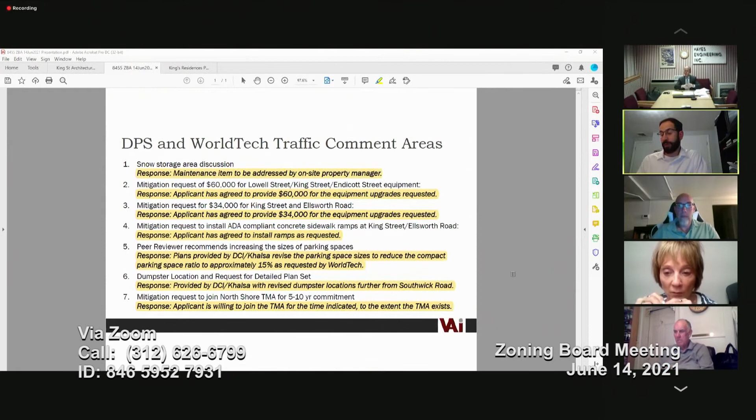No, my thought was, if there's no parking already on that one side, I'm okay with that, I don't care about that. I just want to make sure that if there is spillover, there's some protection based on my prior comments. Again, I'm just one voice, but my thought would be, if the city's looking to do that, or okay with doing that at some point, whether it's now, six months, or a year from now, that the applicant would be willing to condition this upon that. Again, I'm just one voice, everybody else doesn't want to do it, I'll jump off the topic.

So I'm sorry, Fran. So are you talking, Stephen, resident parking on King and Ellsworth?

Yeah, at least those two. Resident parking only? Through the chair, if I could. Yes, I think it's a good idea.

However, I've faced it before. The only problem with that is if you want enforcement, you are restricting the people who actually live there from having visitors who are visiting their house from parking in front of their house during the visit. That's a fair point. I didn't think of it that way.

I'm familiar with resident parking, say in Charlestown and the North End. And if Barry's right, if you're visiting or shopping or doing whatever, it's extremely difficult to find a parking space.

However, perhaps for the residents' sake, especially on King Street, so if you're going up King Street on that right-hand side where the building will be, I definitely think there should be no parking signs, because on the other side of the street where the houses are, they are parking, and the street is wide enough to handle that.

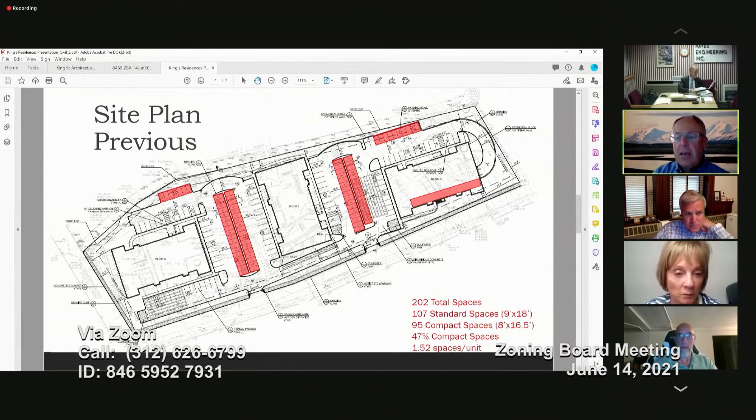The ZBA did not actually get those plans, but as far as the technical review agents, they both received them. Okay, I'll jump into this to keep it brief.

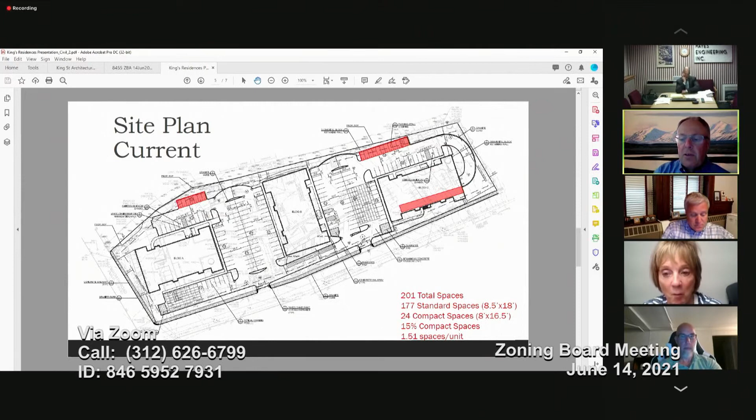I think the major final issue was, as we've talked about, the parking. We had 202 total spaces: 107 full-size 9x18s and 95 compact 8x16.5 at 47%, with a rate of 1.52 spaces per unit. In discussions with the reviewers, we came to a consensus that the standard space didn't need to be a full 9-foot width, so it was reduced to 8.5 by 18 for the standard space, and the compact remained at 8x16.5. So we lost one space, bringing us to 201, with 24 total compact spaces at 15%, which is well below what is typically acceptable even for a non-affordable element.

One item, let's go back a slide. As mentioned, we are cleaning up the southern curb line of Southwick—there'll be a defined edge, no longer open pavement in between. There'll be a landscape buffer with a defined edge and no access off that road.

The dumpsters, you can see them on the plan here. There's one placed up at the corner of Ellsworth, and another one pushed all the way up to King. They were moved as far away as possible as part of the review.

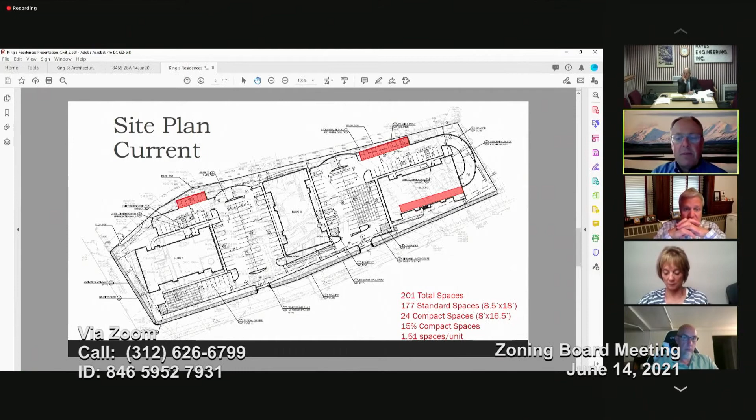All right, we'll jump to stormwater. As part of the final comments, there was a request to get more aggressive with our reductions. You can see the dashed blue line—that was our previous size inside the blue shaded area—and we expanded the infiltration basins by about 25%. The criteria was to hold the entirety of the 10-year storm that flows to those basins, which we have done. This renders substantial reductions: a 49 to 23% reduction to the Southwick stormwater system and a 22 to 18% reduction to the King Street stormwater system. That's a very healthy reduction that will mitigate impacts from today's runoff in the future, reducing the burden on downstream drainage infrastructure.

Also, there was an ask to provide water quality units prior to discharging to the city. So we added a water quality unit at the south, prior to the Southwick discharge, and another prior to the King Street discharge. So the water quality we discharge to the city system is greatly improved.

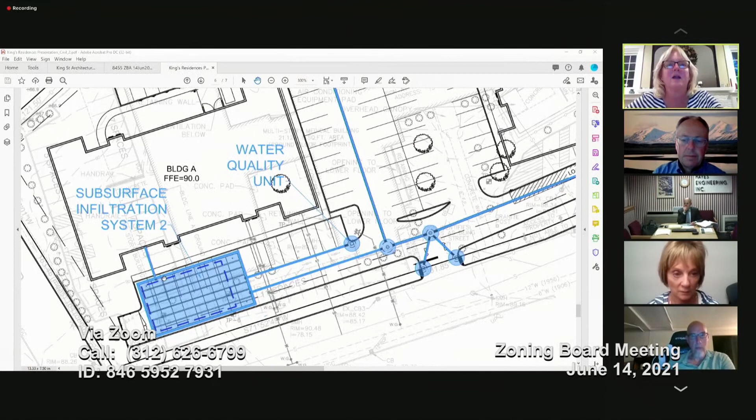They added a little bit of the pavement of that parking lot and a third water quality unit to the catch basin to provide water quality before it went into the subsurface system, and then it goes out to the street. They increased the two systems to hold the roof runoff and the 10-year storm event. The change to the plans addressed a couple of typographical errors on the plans for inverts, which is why there's a second set of plans dated the 11th.

That's it, thanks. Great, thank you. So far, everybody's happy and everybody's in agreement so far, correct? Yeah, yeah, and Fran, that wraps up stormwater.

I can quickly touch base on water and wastewater to close up. On water, before demoing the building, they'll be disconnecting their buildings from our water system. We asked them to work with the fire department regarding the fire hydrant previously mentioned, which will be behind the retaining wall. The applicant is proposing to reset the hydrant and face it towards Southwick Road, so we asked them to work with the fire department to see if that's acceptable in respect to access.

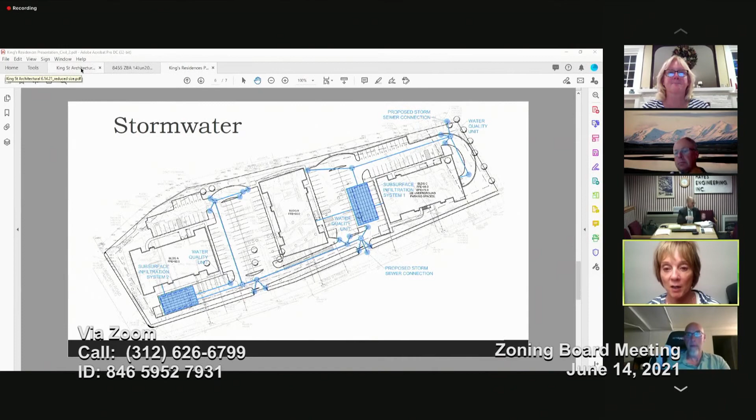So far what I'm hearing is things have been revised, gone over, talked over, and agreed upon. So far, so good. Who are we going to hear from next? Will Chalfant. Chalfant, go ahead. Thank you.

Thank you, Madam Chair. My name is Will Chalfant from Khalsa Design. We're the architects on this project. Our office is located in Somerville. So I'll go as quickly as I can here.

The first slide illustrates the existing site at the top of the page, and the proposed below. We're orienting these buildings with major frontage along Ellsworth and King, creating a landscape buffer around the edge of the entire property. As previously mentioned, we've enlarged our entrance points to help with visibility, and adjusted some of the planting in that area. Another important item is we've relocated the dumpsters down along King, here, here, and here. This gave us a little more green space along Southwick, and will give some much needed softening to the project.

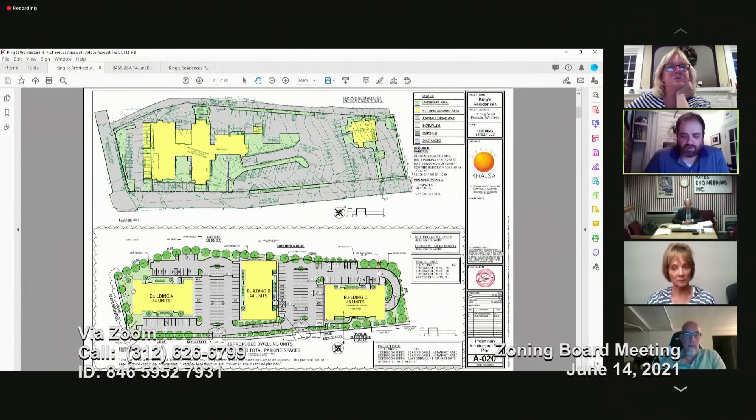I'd like to have Mark Mazzarelli, the landscape architect, go over the planting plan in greater detail, which is right here—I'll zoom in so everyone can read it better. Mark, I'll hand it over to you for a moment.

Will, Mark here. I'm assuming you can all hear me. This plan is a little low res, but if anybody on the board or the public needs to zoom in on a specific area, maybe we can accommodate that. But in general, I'll take you on a quick walkthrough so we can keep this project moving along.

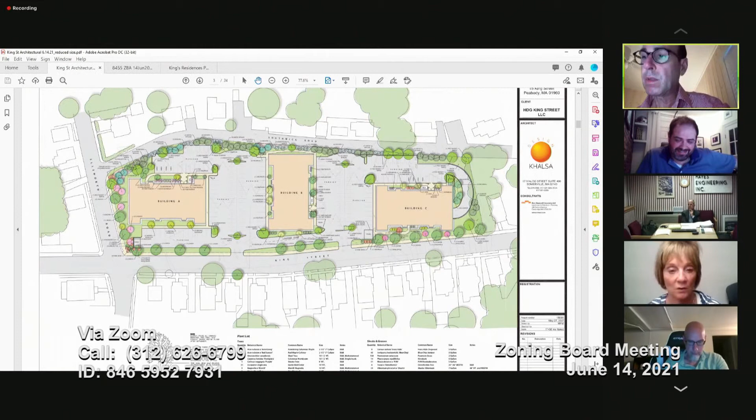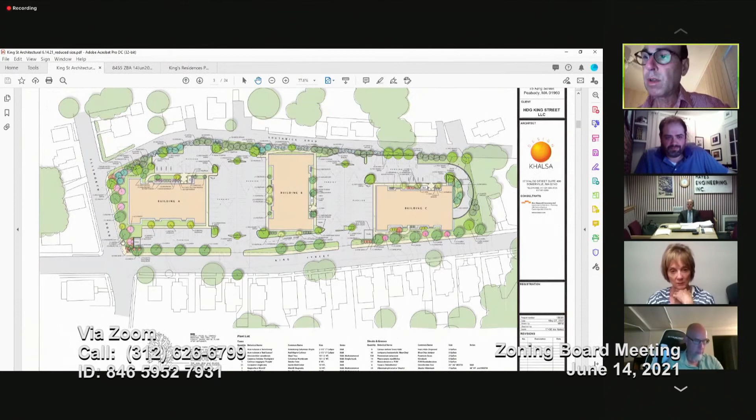Starting on King Street, the intent was to line the street with shade trees, and in the interstitial spaces, introduce flowering trees for additional seasonal interest. As we work around Ellsworth, the idea is to continue the shade trees and really bulk up on the flowering trees where we can.

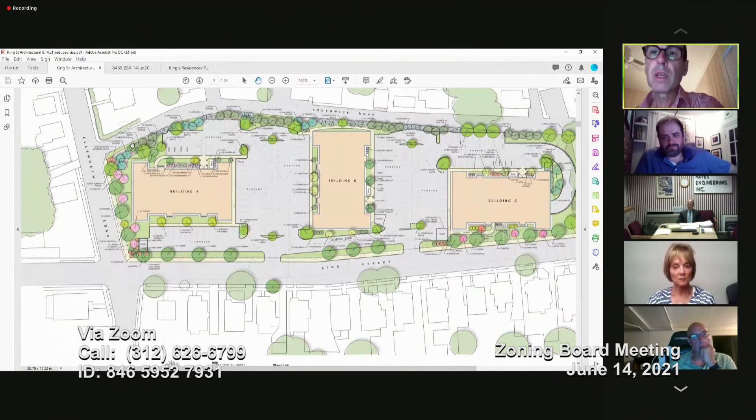And then as we work our way down Southwick, that's where we put the emphasis on evergreens to give privacy and separation from both our project and the neighbors on Southwick Road. It's a mix of evergreens, primarily cedars and spruces, trees that do very well in harsh environments and will withstand the conditions along the road. In the interior, we're very much interested in framing the entrances and anchoring buildings wherever we can with trees to help bring the project scale down with vegetation.

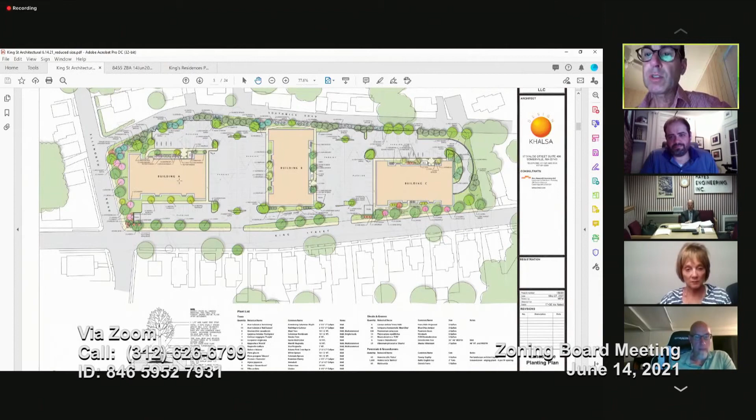That's sort of the quick walkthrough. I can get into specifics if you'd like. There's a plant list included on the plan.

Wherever... is he not coming through? Wherever possible, we've been using native plants and plants that... sorry, is my voice projecting?

Yeah, go ahead, just wanted to wrap up. We were looking at the plant list and I was talking about the emphasis on natives, which are selected not only for their regional quality, but their hardiness specifically. We want to make sure what we put in...

We lost you a little bit. Can you hear us? But will live in the decades to come. The trees are... Can you hear me? I can hear you just fine.

Okay, I'm sorry, you're fading in and out. I just want to know if you're finished. Yeah, let's wrap it up.

So I don't want to rush you. I do have a couple of questions. So as far as tree maintenance, are you the landscape architect owner of the company that's going to maintain the plantings, or are you just the designer?

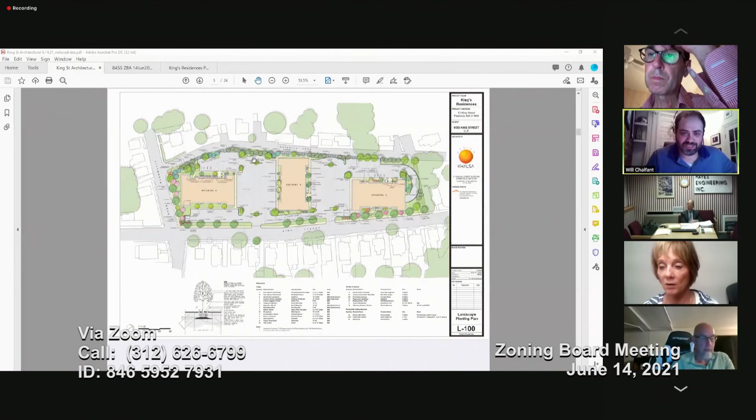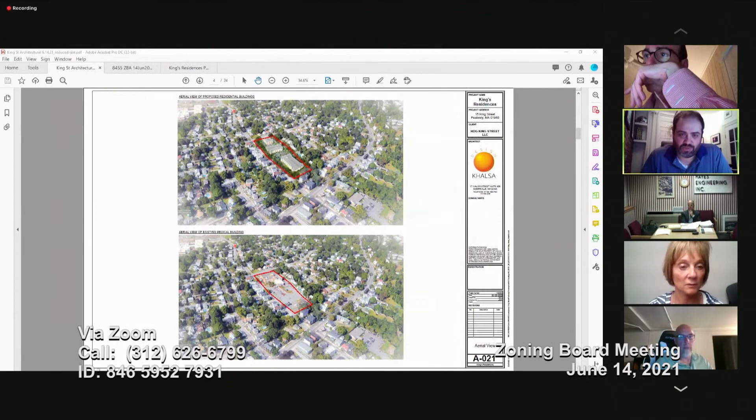Thank you, Mark. So I'll quickly move along here. Here's an aerial of the existing site of the hospital. As you can see, a tremendous amount of asphalt, as we know, and our proposed, which will again have a nice green buffer around the majority of it, and some within amongst the buildings.

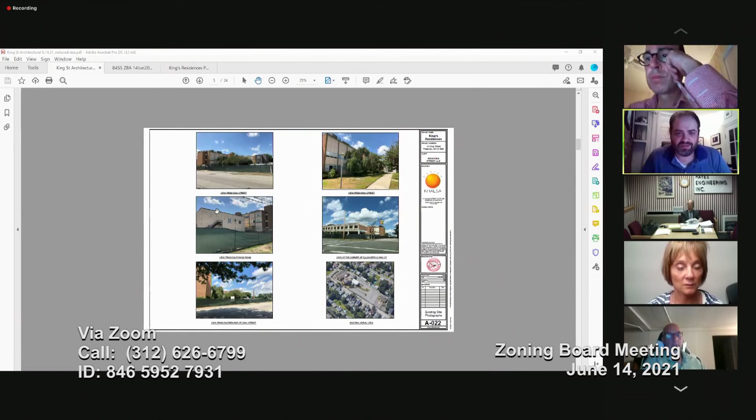So quickly, we have some existing images. I think everyone here is familiar with what this building looks like and the current state of it. Obviously, it's in disrepair. I will quickly go through the floor plans.

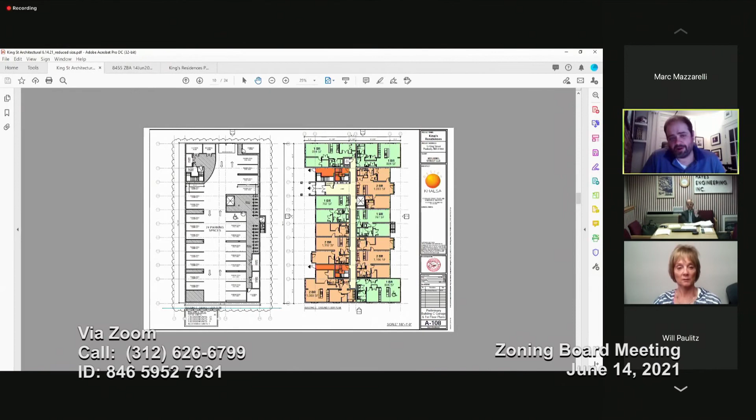And as a result, you sort of sweep around here, this elevator. But downstairs, we're providing 24 parking spaces, as well as a lot of bike parking, additional bike parking that we're not providing at the main entrances of the building. And mechanical facilities, sprinkler, et cetera, will also be housed in this basement level.

The floor plans, again, very similar to A and B, a mix of 1s and 2s. These range in size from 750 at its smallest all the way up to 1,500 square feet for our 3-bedroom units.

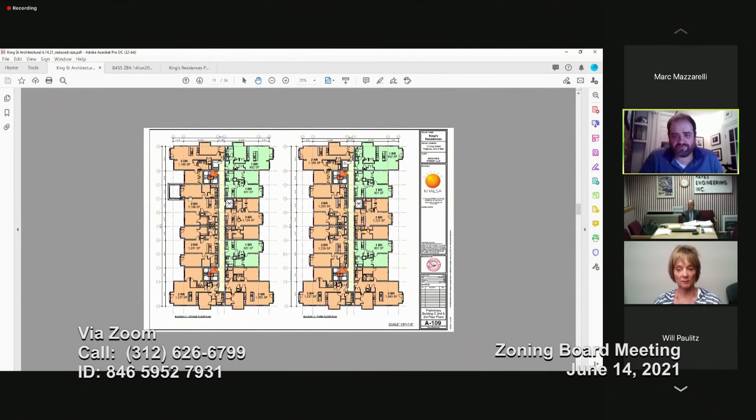And again, the elevation is almost identical, with the exception here that we have this garage entrance, which we've tucked in here using the natural grade to our advantage.

So quickly, we have a mix. We have a lot of different unit types here, which should give a variety to residents. These are all 1-bedroom types, all different slightly in variation depending on where they fall in the building. Some obviously have 2 bays, some have 1, a couple have balconies. And the idea here is to not have a cookie cutter building, but rather different layouts for different residents.

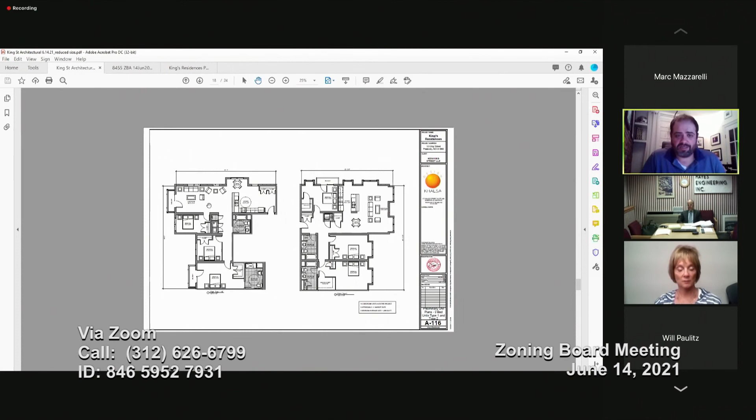So we have obviously different styles of 1s. We also have different style 2-bedrooms, 2-bed, 2-bath, all being serviced with a very similar kitchen, living, dining, open concept main living space. And again, we have 3-bedroom units as well here. These will be predominantly 2-bath as well, not 3-bath. But they will have all the bells and whistles of the others, except some of these will also have balconies being on the top floor to take advantage of the views around Peabody.

So last few slides here. This is a sort of photorealistic rendering, and I apologize if this is too small for people to see, of the buildings and how they relate to the roads that surround it, Southwick, Ellsworth, and King. Again, placing our condensers in the center here and trying to create a buffer of greenery and landscape around.

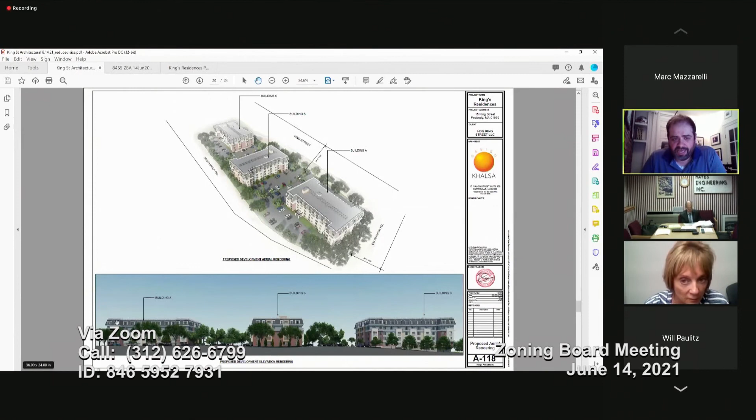And this is a sort of realistic cross section here showing building A at the far left and building C at the far right, and this natural grade change that occurs and how we're really tucking that garage into that grade.

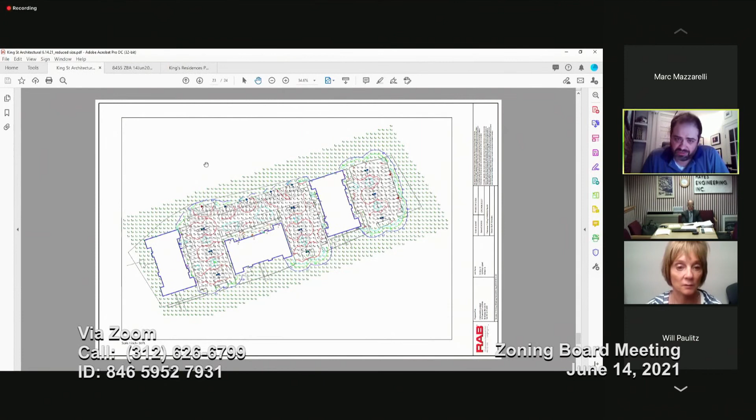So we have a photometric plan here. This measures light pollution, as it were, in foot candles. The idea is to keep all ambient wayfinding light on your site. So anything out here is almost 0 to 1 foot candle, meaning there's no light pollution caused from these buildings to the abutters. Everything is focused within the site.

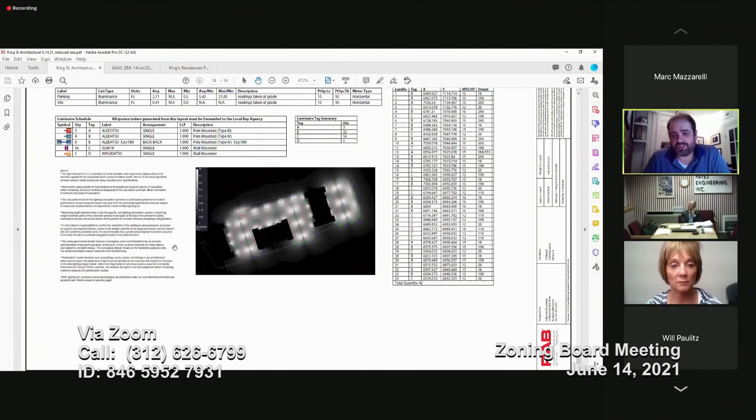This is probably a better view here. All wayfinding light, whether it's lamp posts or pedestrian walkways, will be maintained on site. We'll be using shades on those lamp posts so that all light will be forced downward opposed to going to the side, to existing neighbors. The idea is to provide a safe experience for residents on the site so that they can see, but also not intrude on the abutters.

So with that, I will open it up to questions and kick it back to Attorney Panos.

Okay, thank you for that. That was a great presentation by you and by everyone this evening. Jason, do we have anybody else at this point that needs to report to us?

From the development team side, we're done. I'd suggest that if you want to see what this is going to look like, this architect designed the River Rock project down at Salem, off Dodge Flint Street. Yeah, I've been by there. It's very nice. This is a little taller, but that's essentially what it's going to look like.

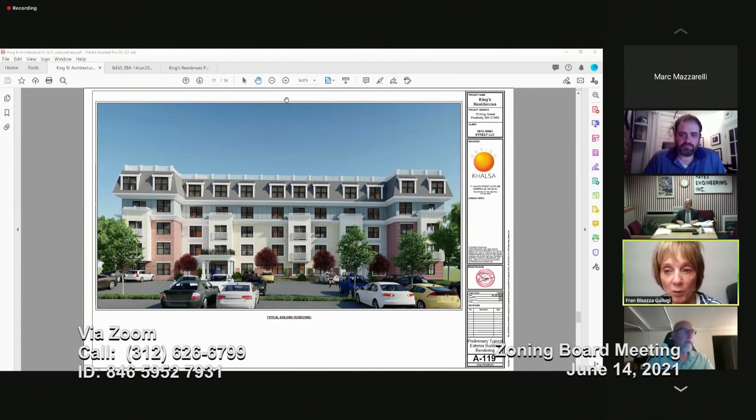So, answering my question, do you have anybody else that needs to present? We're finished. Okay, so Will, do you have anything you want to add? No, I think we've concluded our end of it.

As far as it looks to me, everybody has worked extremely hard. City side and the development side seem to be in complete agreement as to all the peer review issues. Do I have anybody from the board who would like to ask a question or comment on anything? And do I have anybody in the audience who would like to speak on this proposal? There's nobody in the audience.

Well, yes, we do. Suzanne Jobski, would you like to speak? Hi, how's it going? Oh, okay, it's not Suzanne, but go ahead, you may. So my name is Ryan Cox.

I did have a question. It was brought up as far as the 40B proposal and application. Could you give us your address, please? 11 Hamrick Road. You're in West Peabody? Yep.

Okay, go ahead. So I had a question about the 40Bs because it was brought up in this discussion. I was wondering if you could clarify, because it said that it could not be denied because the application was already in process. Could you clarify what that actually means?